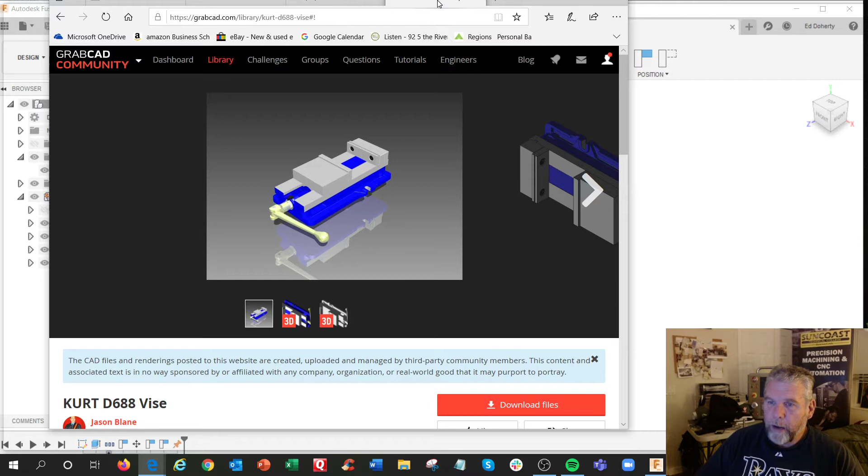You can get models of other vises. I found this one on GrabCAD. This is the exact same vice we have, the Kurt D688, or you can download it from Kurt themselves. This guy says he used the Kurt vise in Mastercam for simulation of toolpath animations. So I downloaded this STP file.

So I am going to bring it into this here. Let's see, open. Or I think you can do import also, or upload. Let me do upload.

Select files, and where did I put it here? Downloads? Nope. Let me check. Public downloads. Teacher training 3D week 1. There it is right there. SolidWorks file, Kurt 688. Okay.

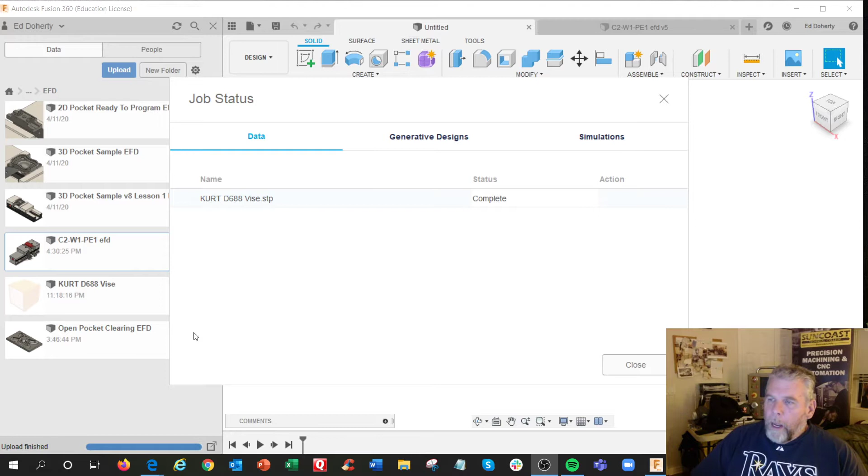Gonna open that one. Upload. And here it comes, flying in here. And close. So now here it is right here. Okay.

For the handle, okay, I was actually watching another guy's video and they were talking about a lot of this uploaded stuff. You could probably trim away or condense a lot of it so it's easier to manipulate. Like in this here, we probably don't need the handle. I don't know which one is which, but anyway.

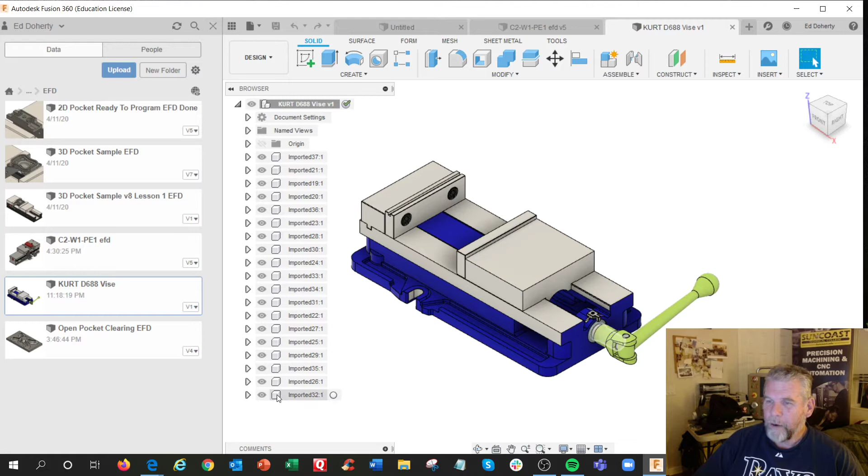So right now they are all bodies, imported. Let me close this up. And I've been learning that there's bodies and components.

If you're trying to align something, you should probably move the component, the vise, to align to where the part is. And I thought it was the other way around, actually. I'm trying to figure out the advantages and disadvantages of that.

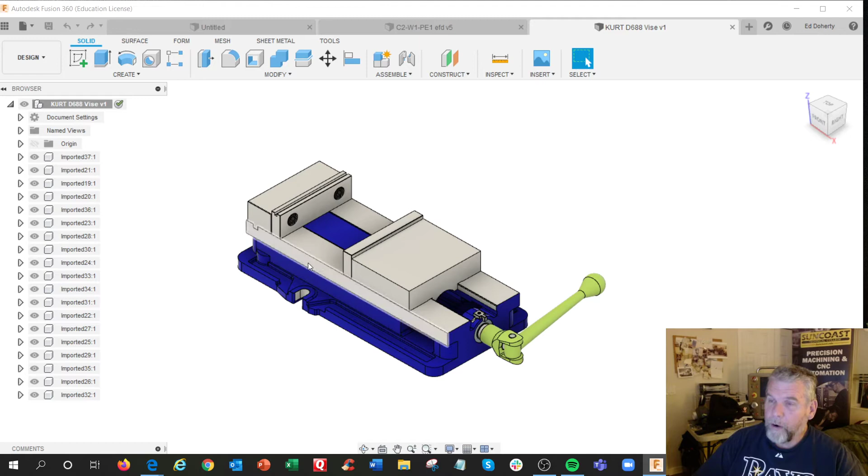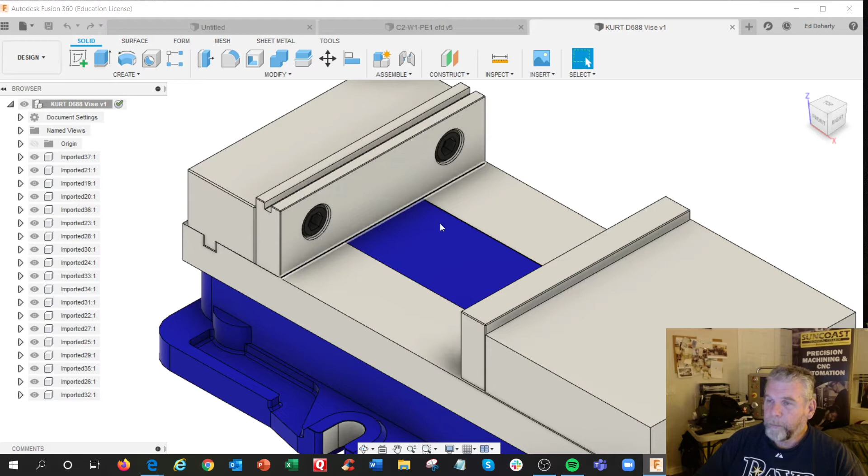But I think in this case, we could use parallels here, or actually make a set of jaws just like the ones we have, and align them on the vise. Then you can really do a true simulation of whether it's going to hit or not, you know. Or something even with Mitee-Bite. I think you can even get the Mitee-Bite Raptor clamps and truly have a really good simulation.

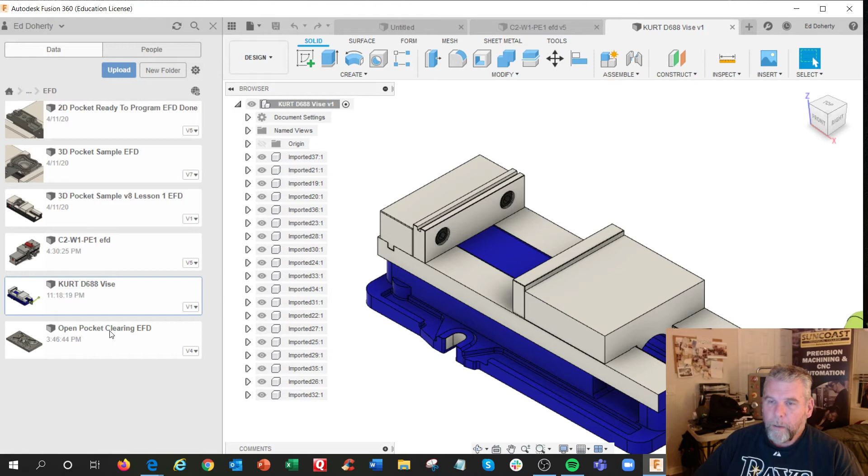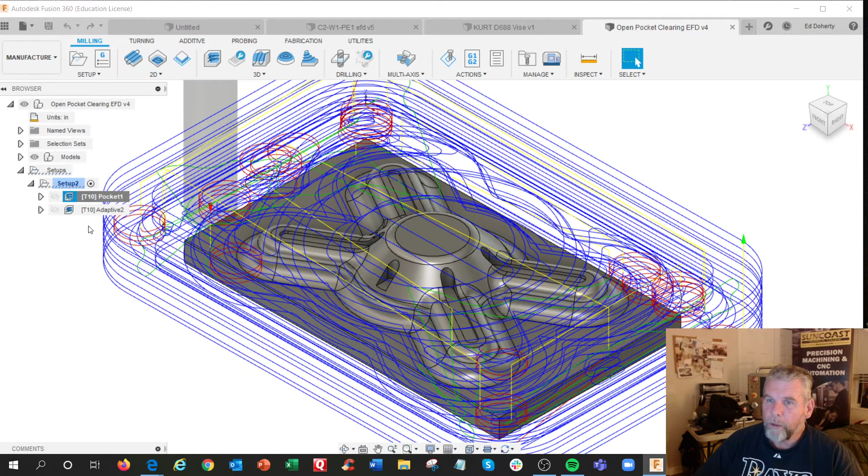So what I was learning was, let me try something here. This one here, I was doing a lesson on different pocketing routines. This was the sample file that they gave me. I uploaded it and they had us do different styles, and doing also a time study of which one was better and why in different settings. It was a little bit more detailed on why you would use this pocket clearing versus adaptive clearing.

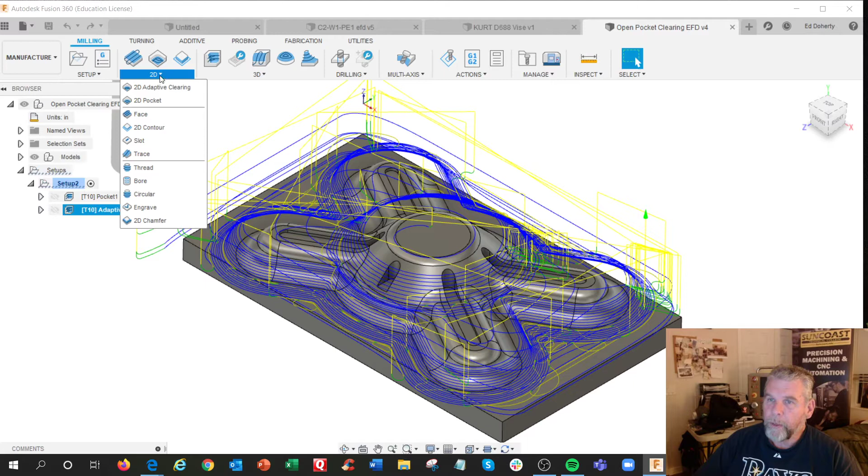And this is in 3D, really a 3D scenario, and then we did some in 2D, adaptive and pocket. And what did I do in this one? I also drew a bodies, a clear box of what the stock would be.

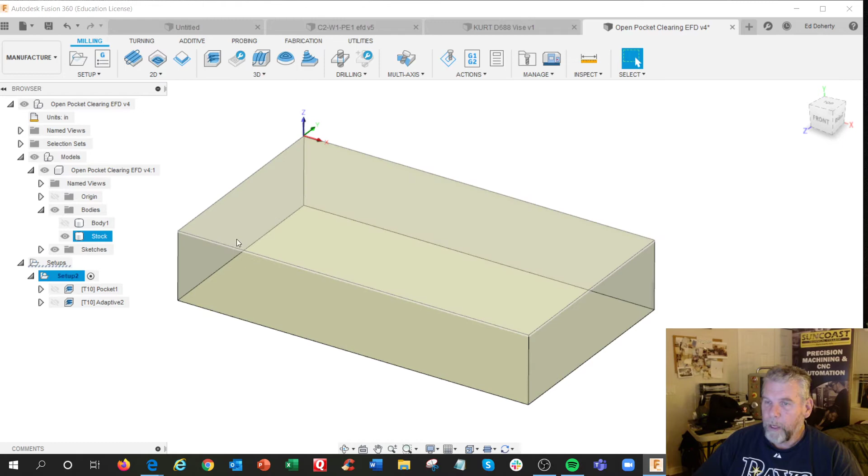So if I shut that off, I did a representation of the stock versus this. This is kind of for simulation purposes. But I was doing this as a setup kind of scenario.

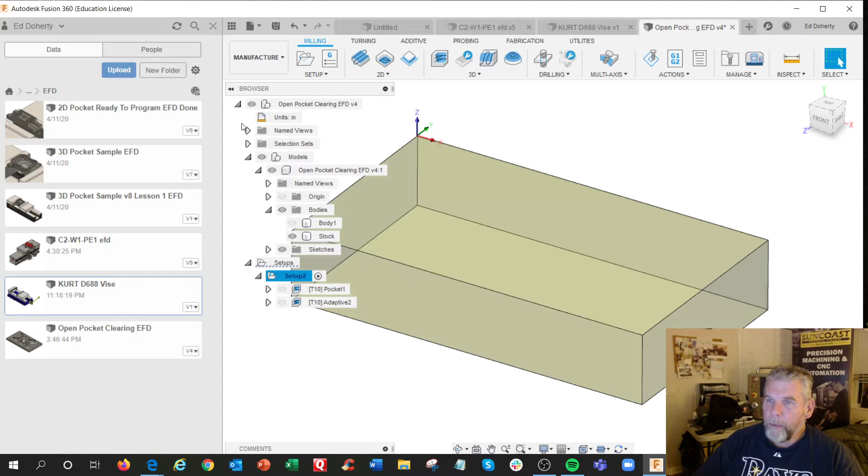So in this case, let's use this vise for this part. And you could drag and drop it in here, or you can just say insert into current design.

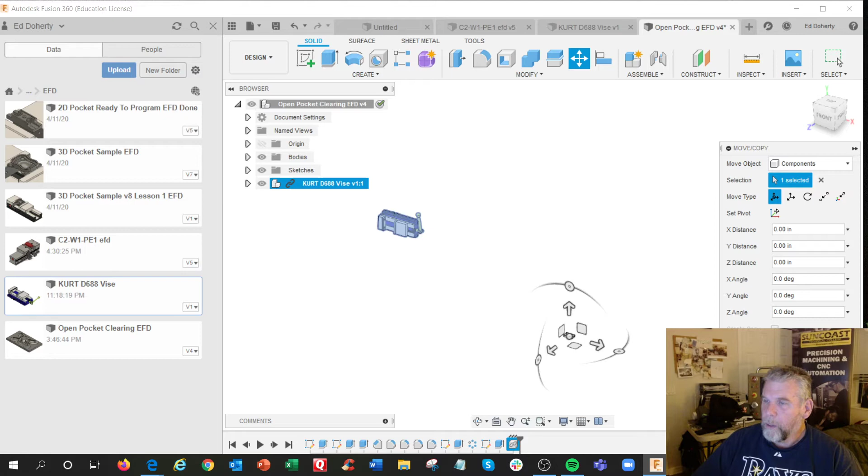I think I was even watching a Lars Christensen video, and they'll talk about like where the vise is and where the part is could be completely different locations. So I was told don't move the part, move the vise. So in this case, I'm just going to hit OK.

And obviously this is like way down here, and this is way up there. Alright, so I'm going to move, and this is linked to this one here. And you want to break the link. Well, actually, let me move it first.

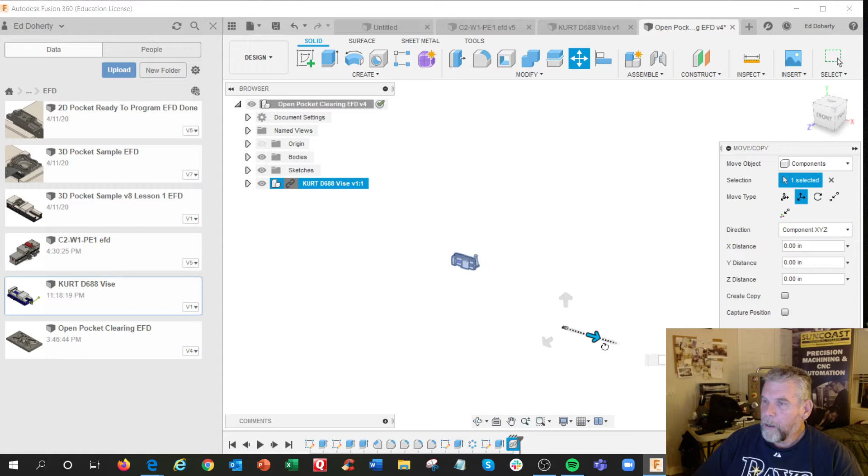Alright, so I'm selecting that component, and I'm going to use translate. I'm actually just moving it to get it a little bit closer. Then I'll double click, okay, so we're in the ballpark now. And if this is the origin of the part right there, let me turn on the real material.

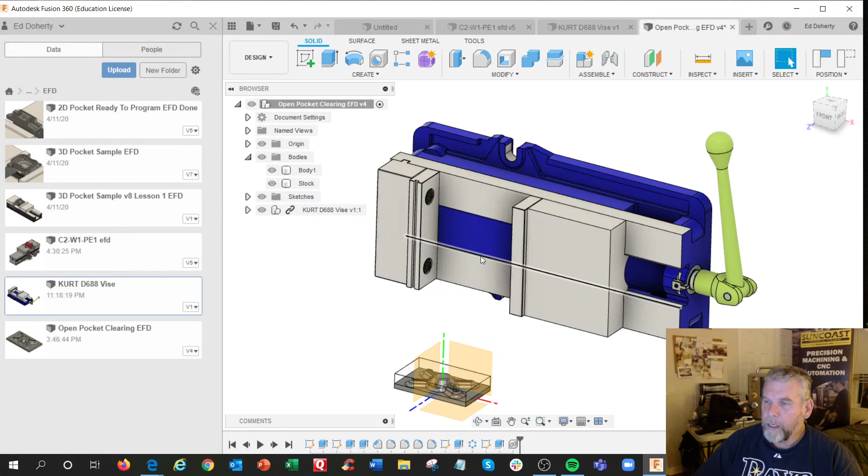We want to get this aligned to this. So in the course, it was teaching me how to do that. Probably I wanted the long way to be on the jaw this way. So I want to tilt this.

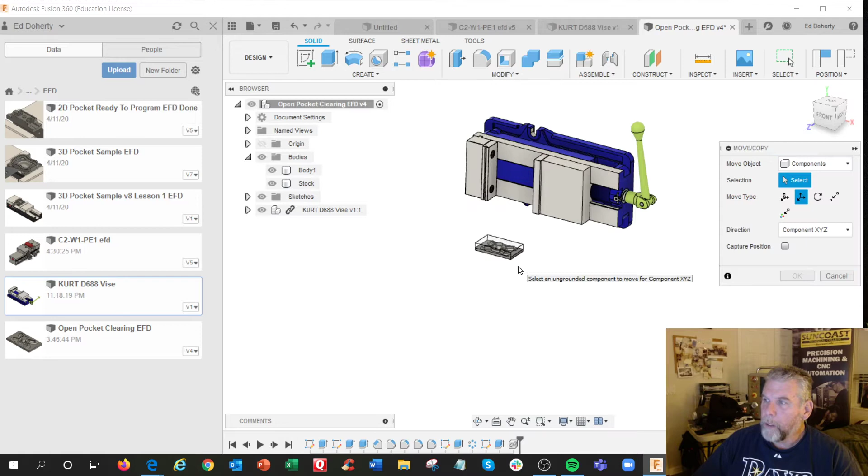Oh, let me see here now. Modify, move, copy, okay. So if I select this component right here, and I'm going to rotate it. So let's see, axes of rotation. I need to have an origin here.

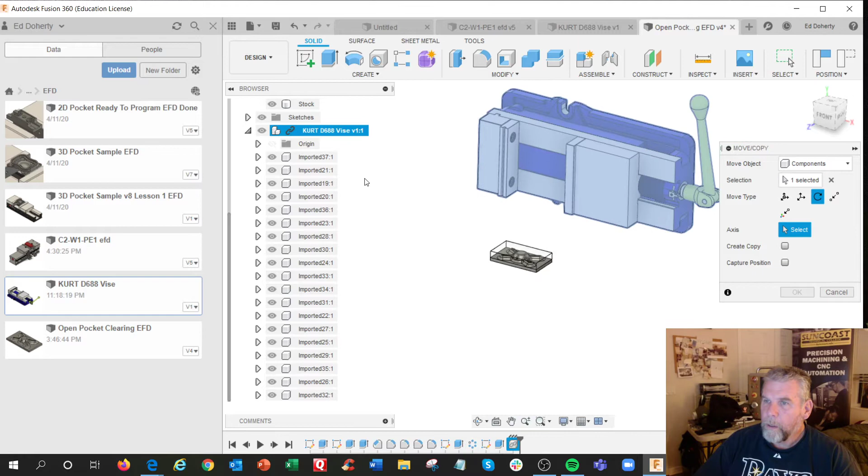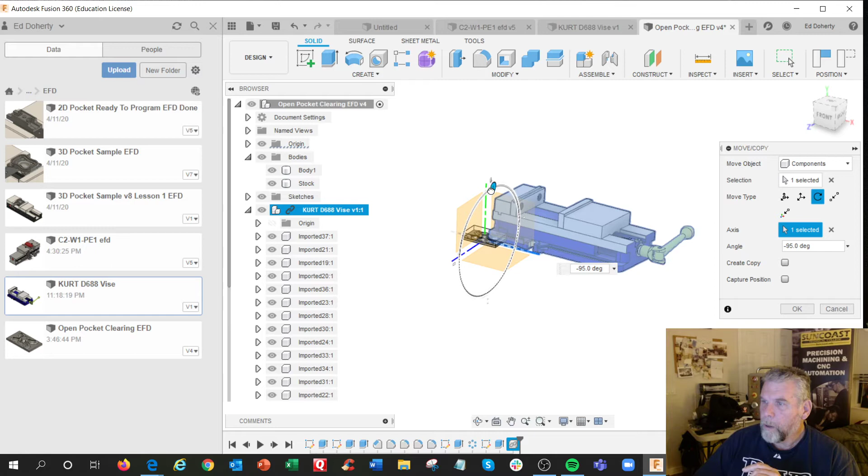Maybe not. Let me turn on, go up here, turn this one on. I want to rotate around this axis right here, this one here, in this direction. Come on, a little bit more. Come on, you can do it. Or just type it in. Alright, so we got it kind of on the same plane.

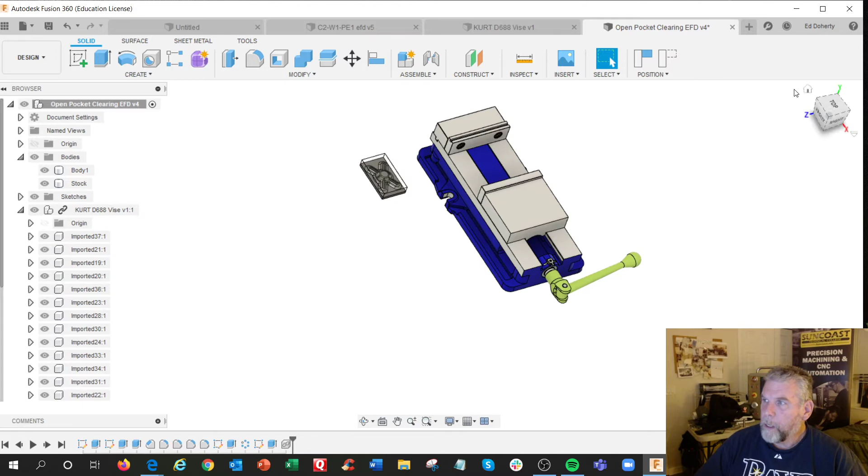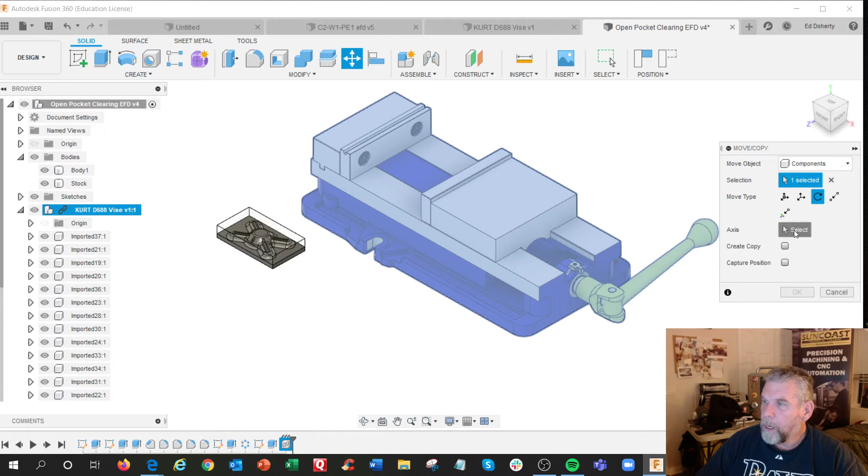I can shut that one off. I'm going to enlarge my window here, hit the home view. Alright, I got it rotated this way. We hit the move again, select that component and rotate, and axis selection, which means I got to turn this one back on so I get this. Alright, I'm going to go this way.

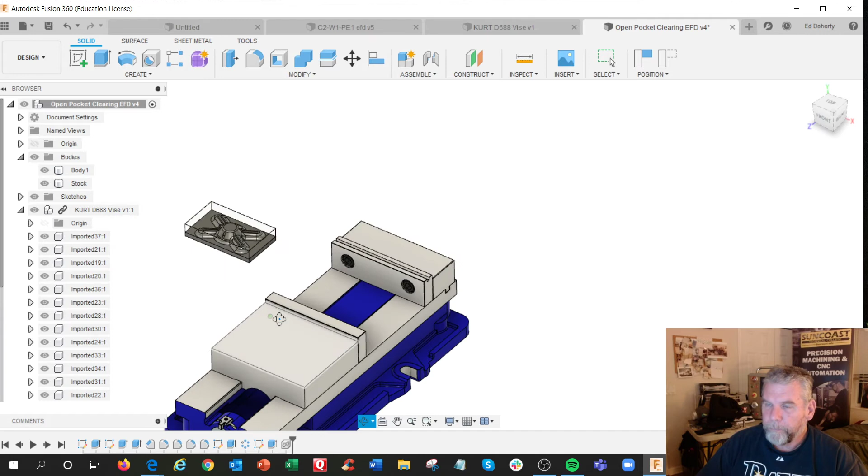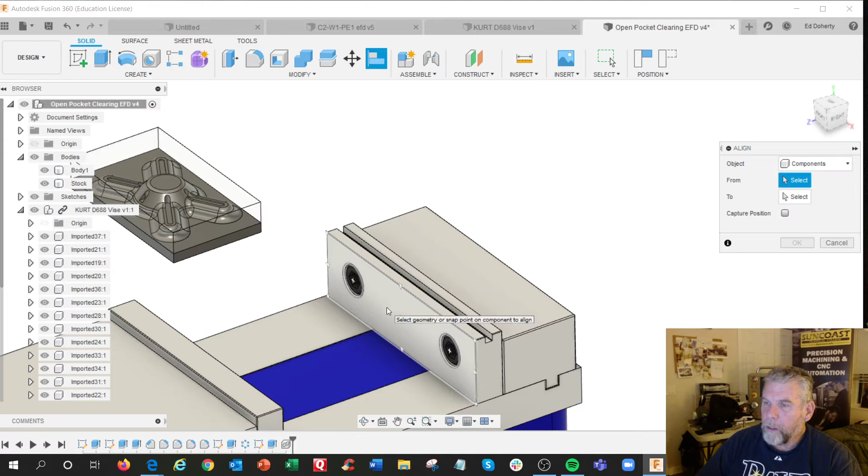Minus 90. Okay. Looks a little bit better. Now I'm going to do this align. Alright, so I want to move the component to this. Select from, to, oh yeah, I want to select this right there, to, and I think if you hold the control key, you can kind of lock in the plane here, right? Just like that. Only down here I want it.

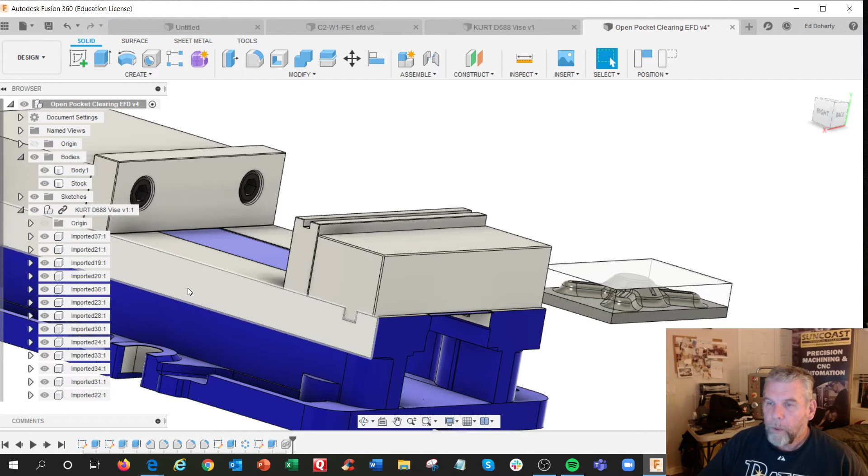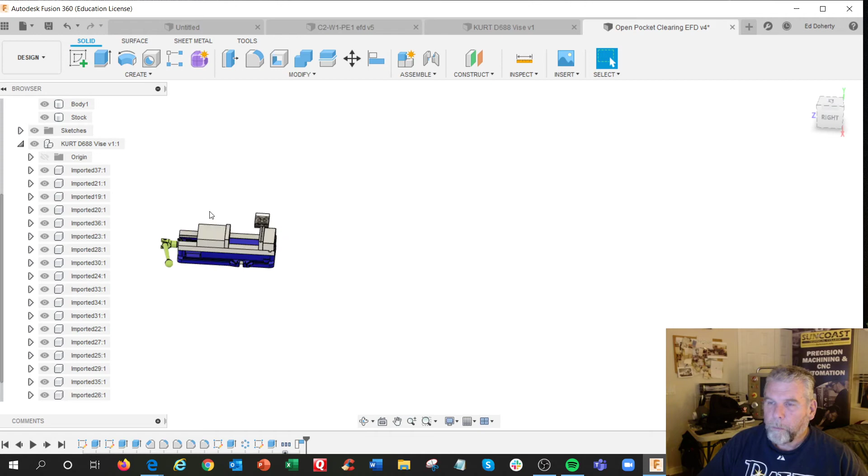Oh, I only moved the vise jaw. All right, I don't want that. Let me unlink this first. Break link. Continue. Right, so this is not connected to the original drawing. And try the move again. No, align. I want to align. Align from this up in the top corner to

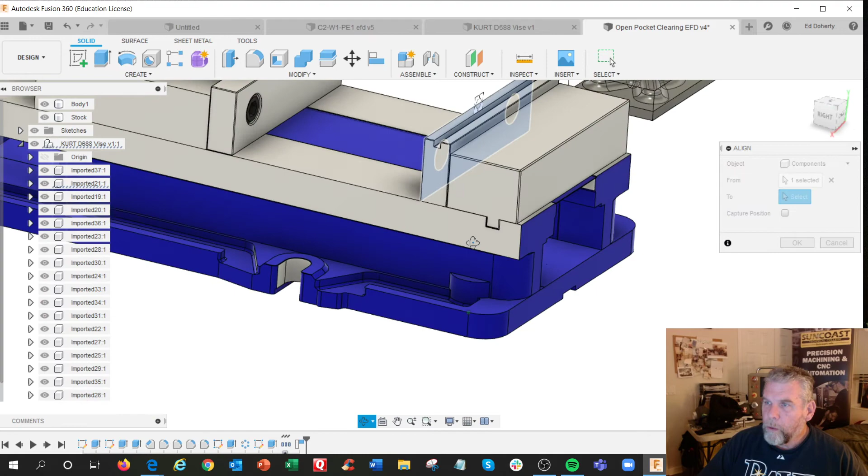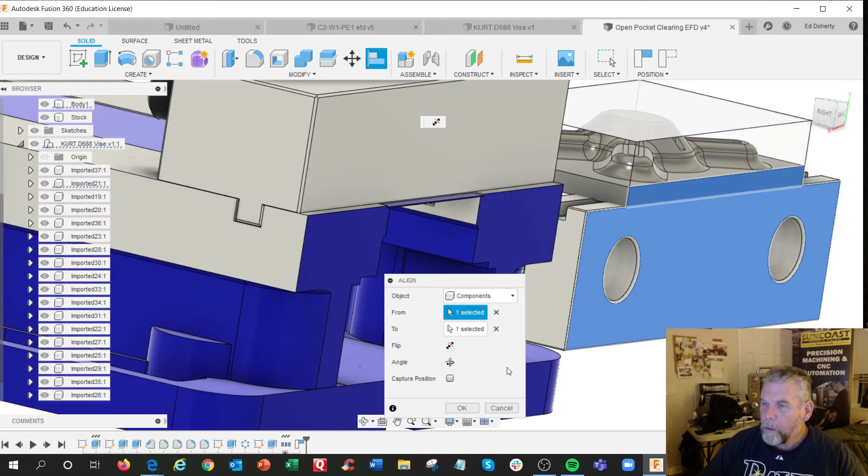come on. Forgot how to pan. Get this out of the way. Right. I think it's going to do the same thing again. Yep. How come it didn't take everything? We just hit OK or capture position. Okay. Well, sort of halfway right. Okay. All right. See, everything's floating around now. Let's see. I think you could hit this revert position.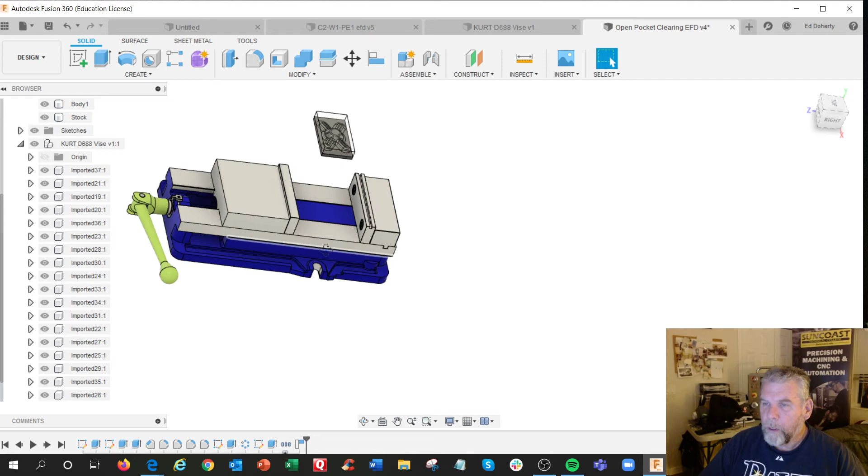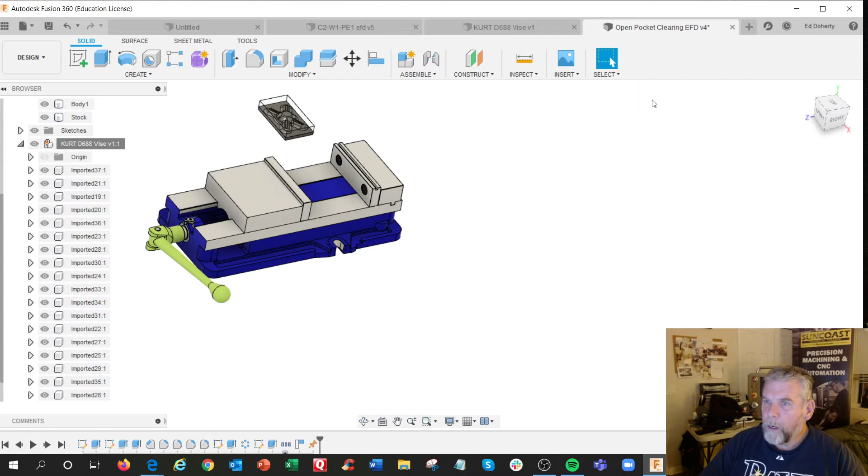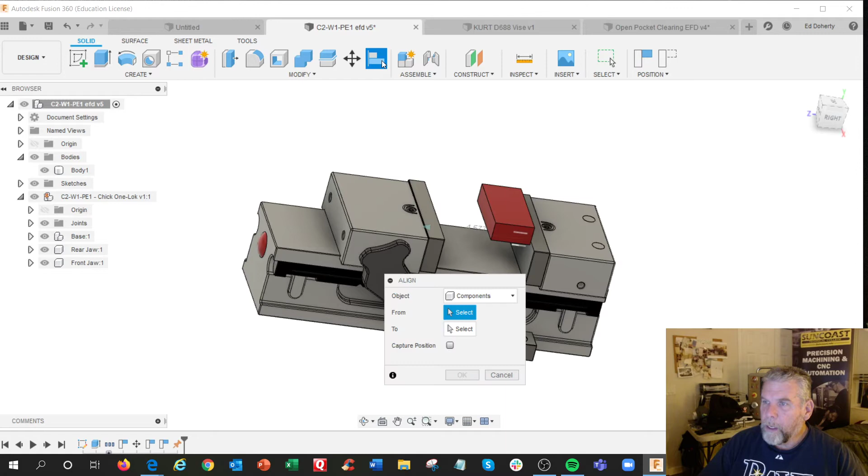Unless you ground this one. If you ground it, ground this. Now you can, oh. I thought I grounded it. Revert. There we go. Alright. I just did this other one here. This one I got, so this moves back and forth. I align that. And if I did align, pick the whole face to this one. Yeah, so now they're lined up with each other. Right, okay.

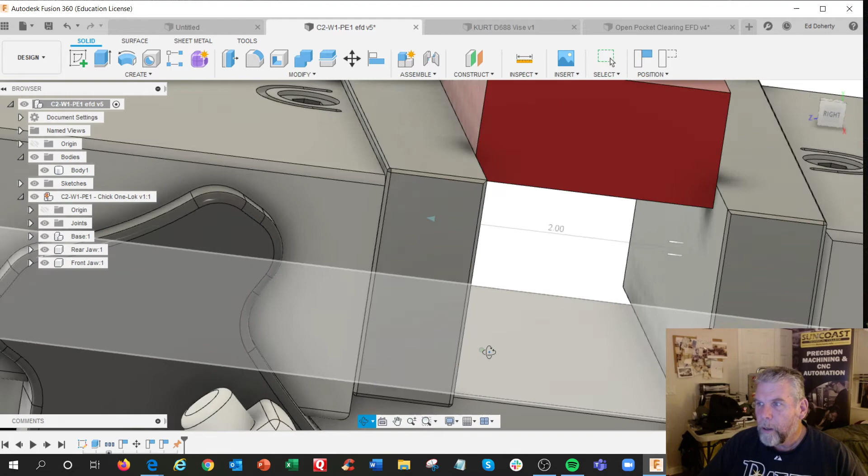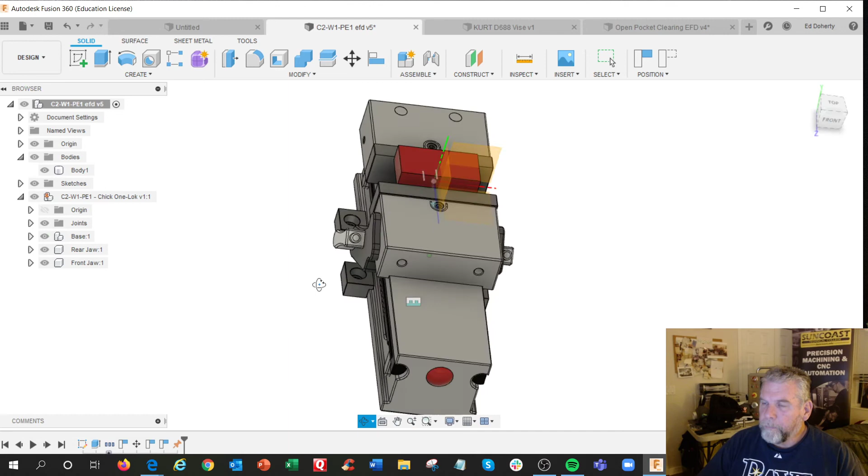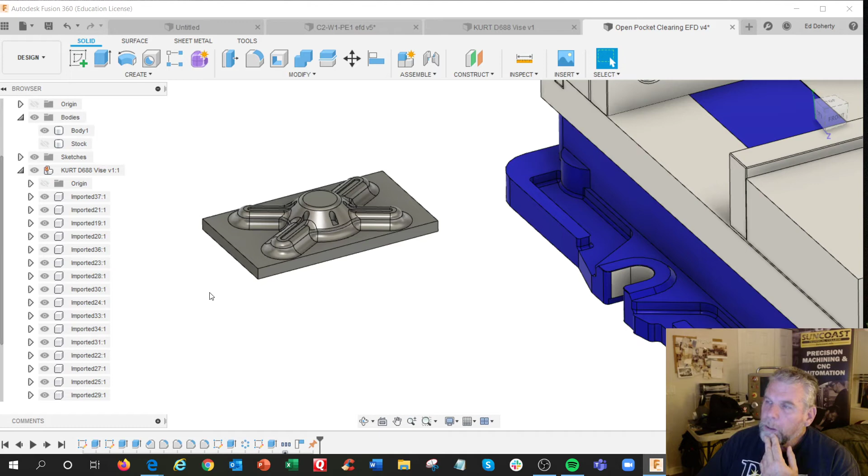And actually when I brought it in, I moved it so it's 250. I actually moved the vise up, not the part down. So this still has its old origin, which is in the middle of this thing. All right. All right, so I got my Kurt vise. I got this inserted in here. Let me click this. I want to get this in the vise. I can shut the stock off. I'll figure this out.

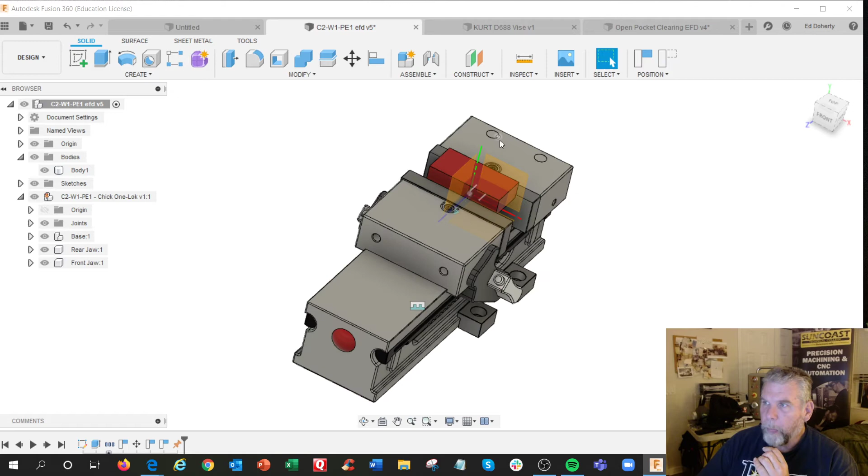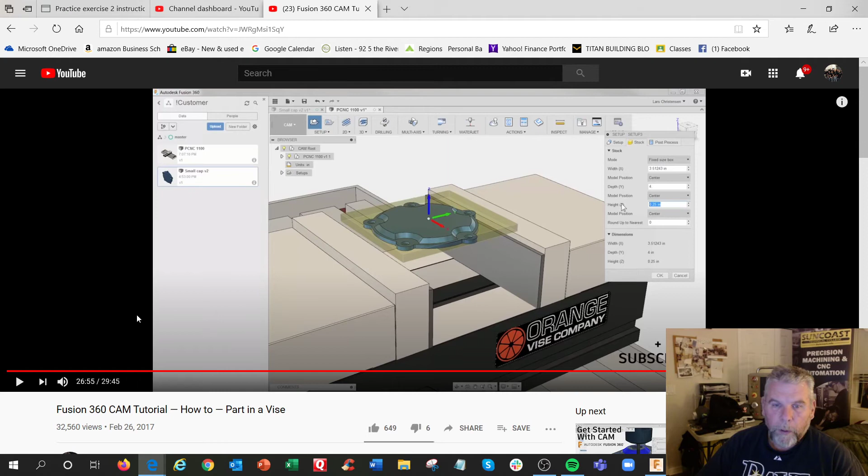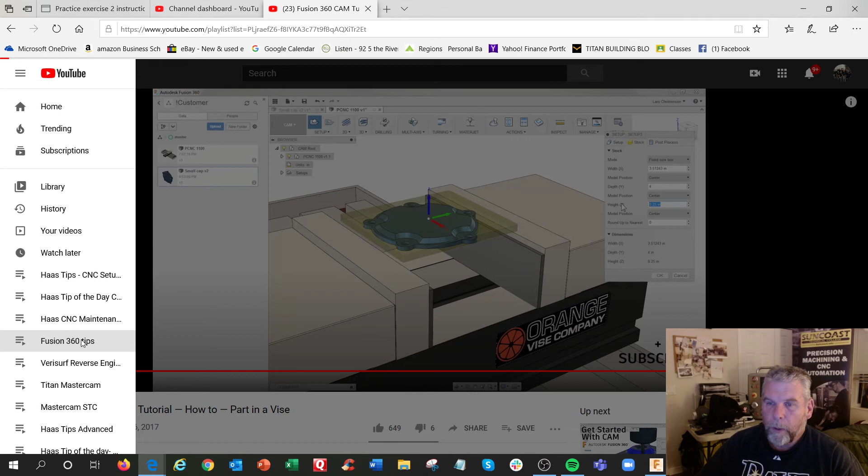Let's go look at this one. Okay, this one only has base, rear jaw, front jaw. It's joined together. Maybe that's why. This one is not joined together. Alright, maybe I gotta fix those. Yeah, what did I learn about eliminating stuff? I was watching a video. I don't need this anymore. This was another one. This is a Lars Christensen tutorial, but where am I here? Fusion tips. Here we go. This guy was pretty good.

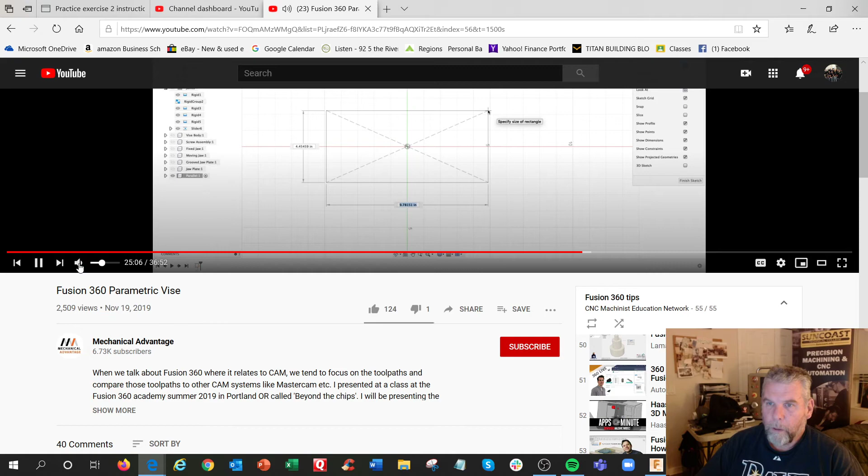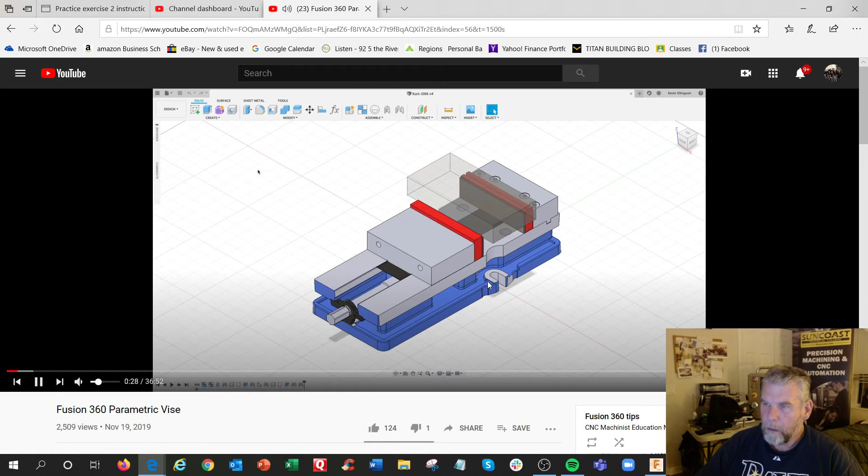And I'm going to sketch a rectangle, a center point rectangle, and I'm going to drag this out. And then typing in numbers I want here, I'm going to refer to those parameters. So he was making it so that he had to use the user parameters so he could change the setups on the fly. But let me go back. It's kind of a long video. Showing a bunch of people in that room how to do this very same thing. And what I'm showing them is how we can take a vise that's downloaded from any manufacturer and use Fusion to turn it sort of into a smart vise. And what do I mean by smart vise?

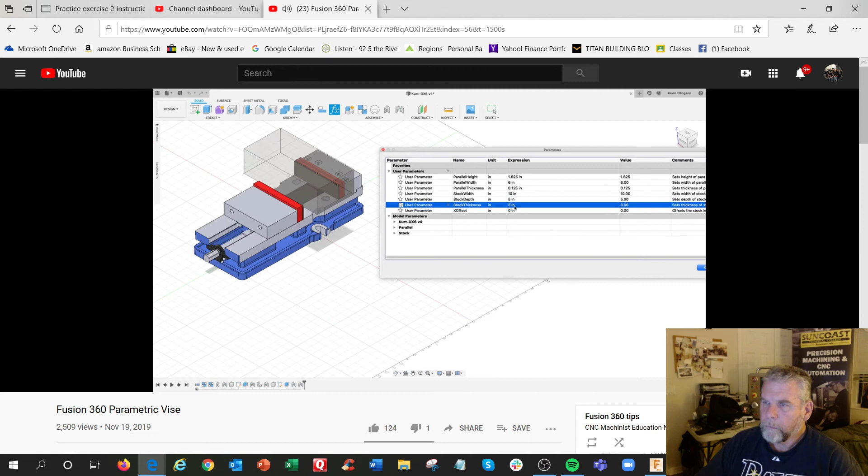I mean that we can go to the change parameters function, and you can see in this particular case that I have the ability to change the parallel height, width, and thickness, and the stock width, depth, and thickness, and also shift the stock. So if I were to change this number to be 10, you'll see my stock gets much wider. If I set this to be 5, you'll see the vise jaws open more. If I set the thickness to 3, you'll see it gets taller. And if I offset it in the X direction, I'll do 2 this way.

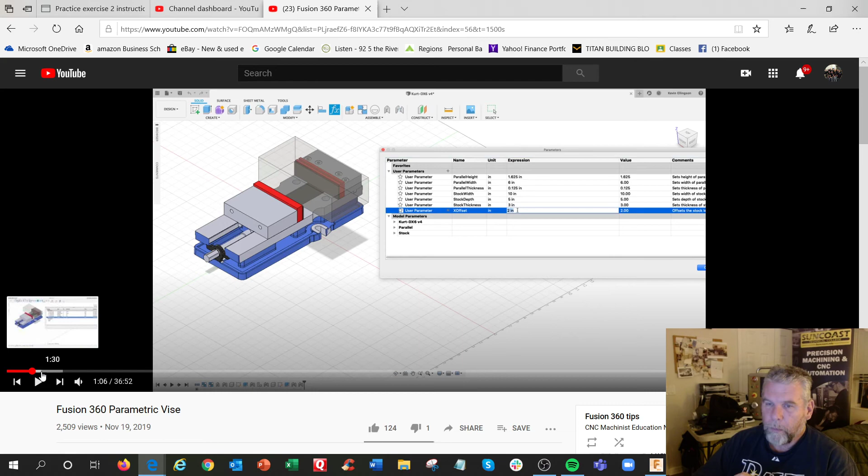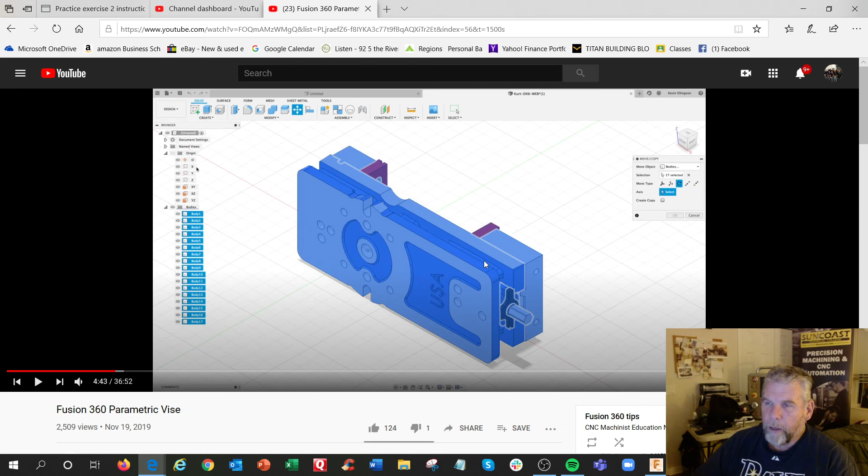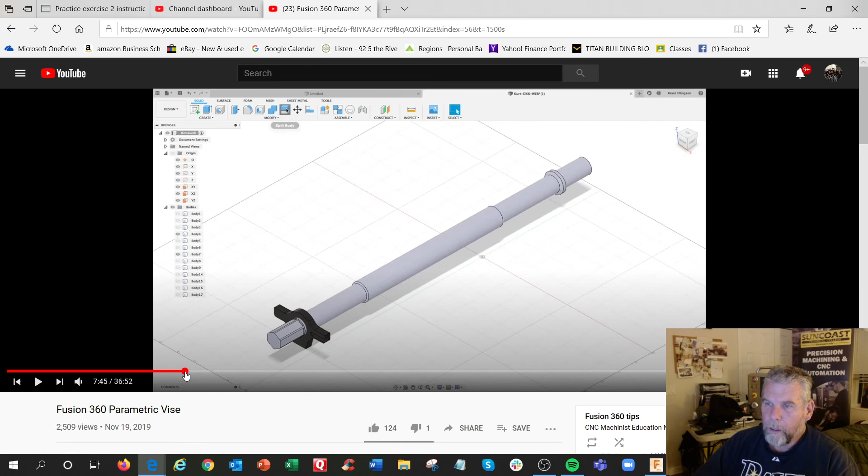So I thought that was pretty cool. You could take a setup to the next level, import your new material and do a better simulation for crash detection. And he was like, this is the Kurt site. I've done the same thing. You can download the models. Right here. This is how you download it. Let me go a little bit forward. And then he was getting into compressing this and joining things together, so you kind of made the file a little bit more manageable. And he was also changing the alignment. Like, do we actually need all the parts and pieces, you know? Because we're only using it for simulation. It becomes harder to manage.

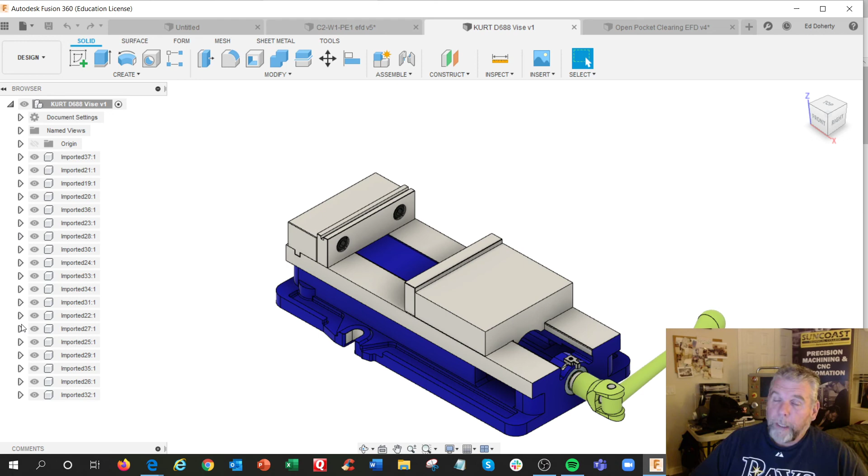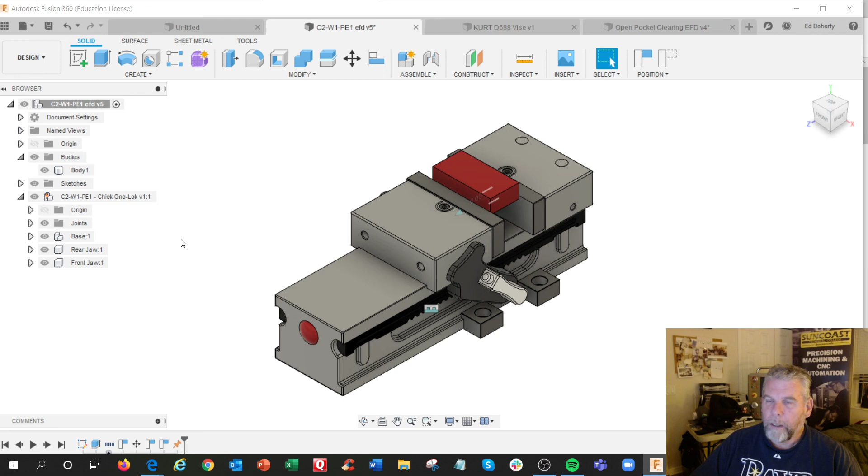Anyway, I'm going to work on this one some more. I just thought I'd give a little update of what I am learning to do. And it's a good area to get into. So actually, the guy teaching this course, I met him online. He's on the Fusion Autodesk Academy team. So they want to come out with certifications for 2.5 axis, 3 axis, and 5 axis on milling and also lathe. So we've been asked to review the certification test and anything that may be not quite right or missing. I think there's a lot of actual machining stuff that's missing. But I'll tell you, these guys do a pretty good job.

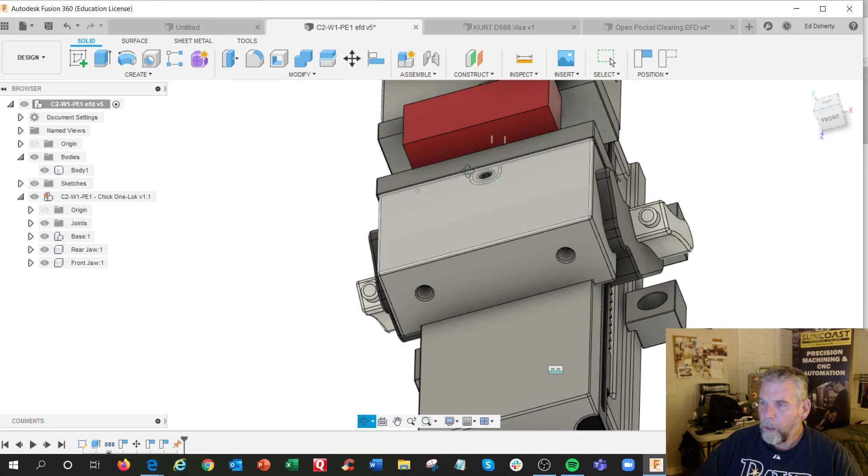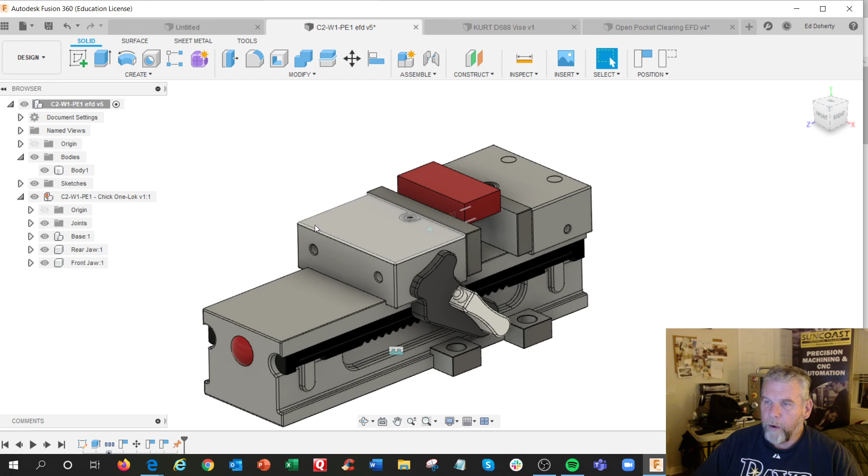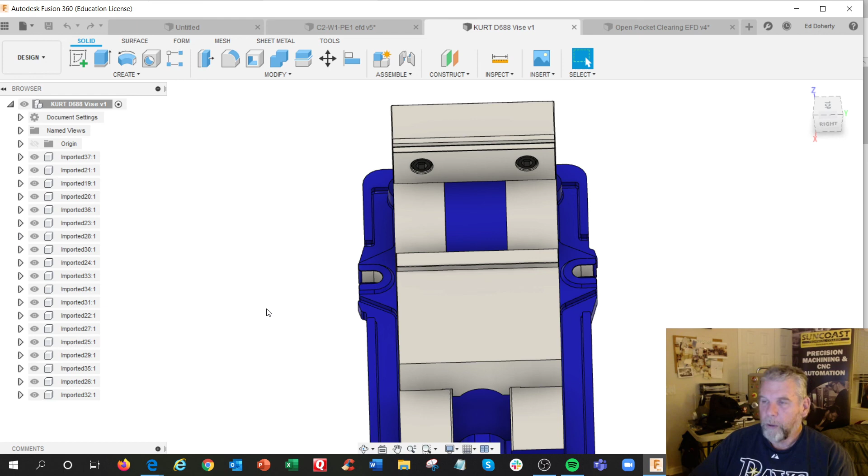But even looking at this vise, this is a little bit different. I'm not sure about these side things. I'm trying to figure out how this works. I don't know how it clamps. But built into Fusion is a bunch of CAM samples already. I think there's one for Orange vise. So I'm actually surprised it's not a Kurt, because Kurt's very popular. This is the older one, and the one in the video was their newer one. Because I look at this one and how wide it is, and the newer one is a little bit narrower, which means you can get more vises on the table. So this is a pretty traditional one. I'm not sure if they actually make this one anymore.